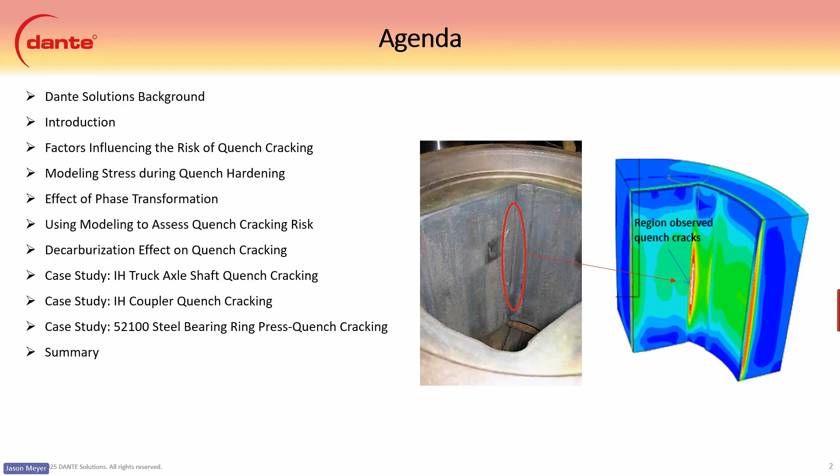So a little bit on the DANTE Solutions background. DANTE is an acronym for Distortion Analysis for Thermal Engineering. We were founded in '82 as Deformation Control Technology, so if you see some papers or publications based on DCT, that would be us, focused on modeling thermal process of metals.

DANTE Solutions has been focusing on heat treatment simulation software since the 1990s, when we were part of a large collaborative effort between industry, academia, and national labs to predict distortion in heat-treated steel alloys. That ran from '92 to 2000, and that's really where the DANTE Solutions software came from. Since then, we've had sole ownership of the software and have been developing, changing, and updating it ever since. The whole project started out of a need to control distortion and reduce scrap in the automotive and aerospace sectors.

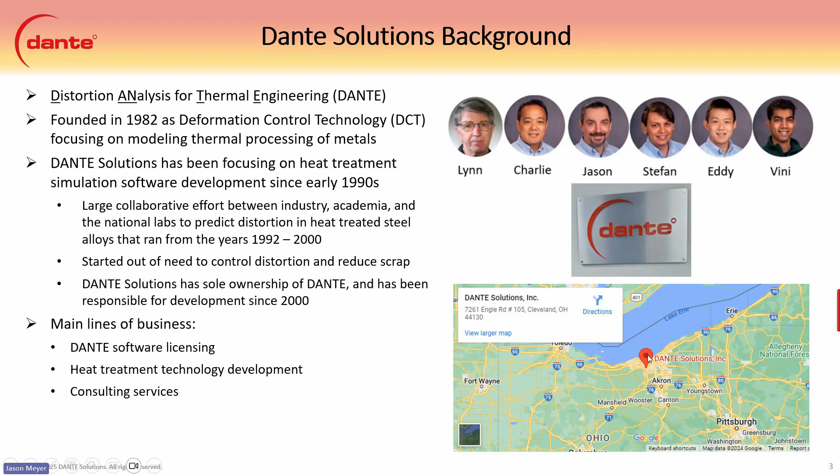Our main lines of business are DANTE software licensing, heat treatment technology development—developing new processes using the software—and consulting services for companies. We're located in Cleveland, Ohio, right on Lake Erie, beautiful, sunny, snowy Cleveland, Ohio. And we've been doing pretty good in this business for quite a while.

A little introduction to quench hardening. During quench hardening, parts undergo extreme temperature change, leading to thermal stresses from temperature gradients. There's a volume change from phase transformations that occurs when you transform to austenite and then to martensite, back and forth, or even to diffusive phases. The phase transformation from austenite to martensite causes high tensile stress to occur, which may result in quench cracking. This is basically from the density change from the more dense austenite transforming to a less dense martensite that takes up larger volume.

These high tensile stresses can cause premature part failure in service, and quenching cracks lead to scrap parts, loss of revenue, and sunken time, so it's a big concern. Understanding the cause of quench cracking can help determine ways to mitigate them. The major applications of DANTE over the years have been troubleshooting and identifying root causes, and providing potential solutions to quench cracking issues.

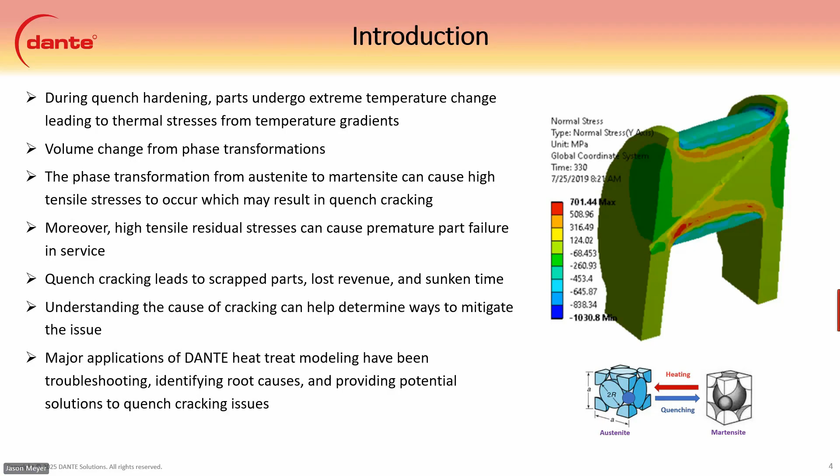So the factors influencing quench cracking: several factors include quenchant selection—a more aggressive quenchant may increase the risk of cracking, but you also have to bear in mind keeping your mechanical properties if you go to a slower quenching. Material hardenability—certain alloy grades are more prone to quench cracking based on the chemical composition. Material defects can have a big effect on stress concentrations, including porosity in the material.

When parts go through heat treatment, those porosities can cause really high stress concentrations, causing cracks. Part geometry, like sharp geometric features, can cause stress concentrations from thermal strains. Process consistency, like part placement and quench agitation, along with a combination of the above, may result in cracks. And decarburization—the lower surface carbon from decarburization results in a higher tensile stress state at the martensite phase at the surface, and this is usually a big cause of cracking. All these factors can be modeled with DANTE.

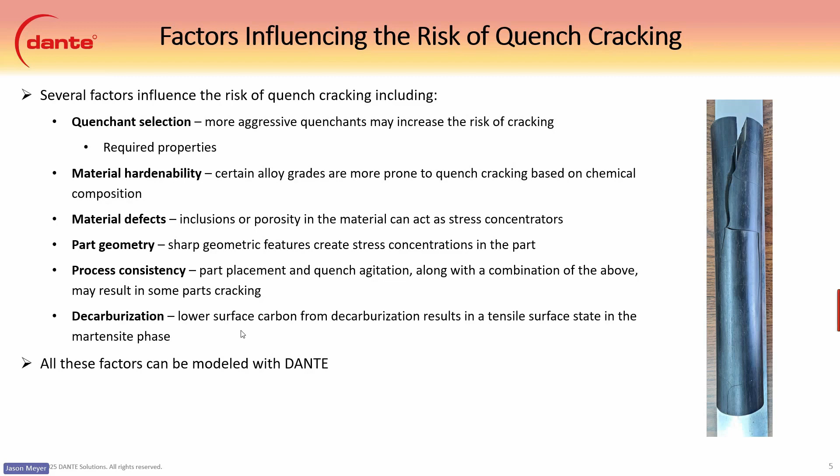So how do we model the stress during quench hardening? With DANTE, we use transient finite element models capable of predicting the nonlinear thermomechanical and phase transformation behavior in the steel alloys. You can see a lot of these yellow or orange arrows here all go into the computer model.

We use thermal boundary conditions, basically in the form of heat transfer coefficients, that we apply to surfaces to represent the heat transfer interaction of the part with the surrounding environment, such as the furnace, the quench vessel, and so on.

We have phase transformation kinetic models that predict the phase transformations and associated transformation strains, and this is really a big part with steels here, like we talked about earlier. And then our multi-phase plasticity model determines the yield criterion of the phases. The strain rate, the temperature, and carbon content all go into that multi-phase plasticity model to really get the mechanical properties down. And what we get out of it is microstructure.

You can see on the contours here below the different phases in the microstructure of the part, so different martensites or different phases of the material. We get dimensional changes, so we can predict the distortion that occurs. And then more importantly for quench hardening, quench cracking here is the residual stresses that occur during the process or even after the process.

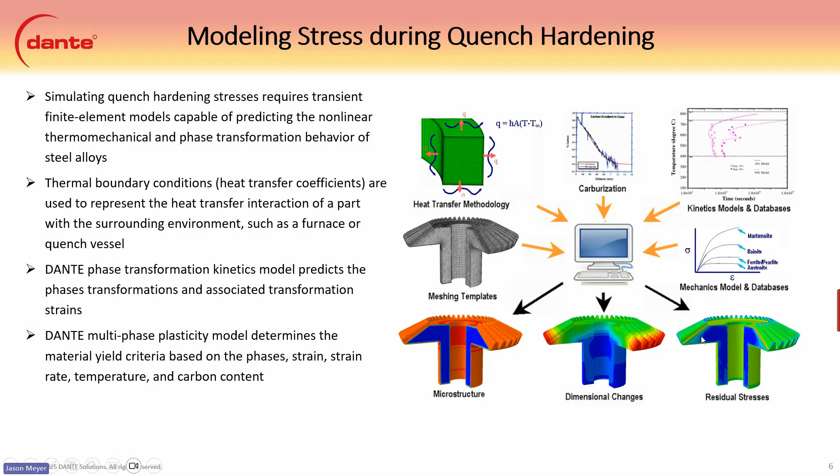So the effect of phase transformation. Quenching causes thermal and transformation-induced stresses. Basically, at the basic level here, the temperature gradient between the surface and the subsurface region causes different phase transformation rates as well. So there's a temperature gradient that causes a phase transformation gradient.

And up here, I have a little example of a one element deep finite element model here, where this would be the surface. You can see the blue color represents a cooler part, and then the red color represents the hotter core of the part. And in an uncarburized part, the martensite transformation from austenite occurs where the temperature is the lowest. So here it would occur first at the surface when it drops below martensite start temperature.

The higher density austenite transforms to lower density martensite, and there's a volume expansion. So you can imagine this area would grow when that martensite is formed from austenite. Then, once the subsurface cools down to MS, this one begins to transform, and when that transforms, it grows as well. This pulls the surface that has already transformed into tension.

If the surface stress is too high, a quench crack can occur due to the brittleness of as-quenched martensite. So over to the right here, we have a little animation that's running here that basically shows the heat treatment process and the phases for the steel.

Upon heating, it goes up to the austenite start temperature. It drops in density, drops in volume, increases in density, and then when it converts to austenite. And then as it's cooled, it converts to martensite, and you can see the volume expansion here on the dilatometry curve. That large volume change here is what we were talking about with pulling the surface into tension here.

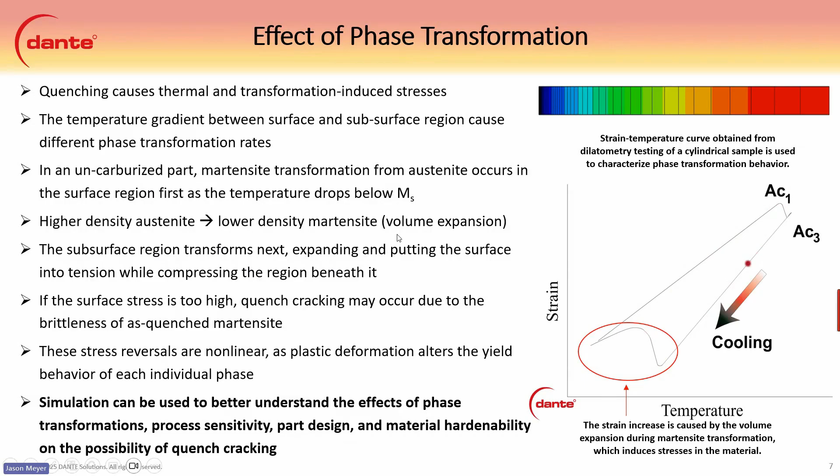So using modeling to assess the quench cracking risks, the predicted in-process stresses and microstructural phases from the model can help assess the risk of cracking. The risk of cracking increases with higher tensile stress, and especially when the microstructure is in the martensite phase. A lot of time when we talk about the cracks, they all happen usually in the martensite, as-quenched martensite phase. Austenite, tempered martensite, and other diffusive phases are more ductile compared to martensite, reducing the crack risk.

Plastic, sorry. So computer modeling is an effective approach to investigate the cracking issues. A sensitivity analysis can show how the part responds to slight changes in the quenching speed, the direction, and temperature. And modeling should be used to aid the design of new processes to reduce the risks of failure before problems arise.

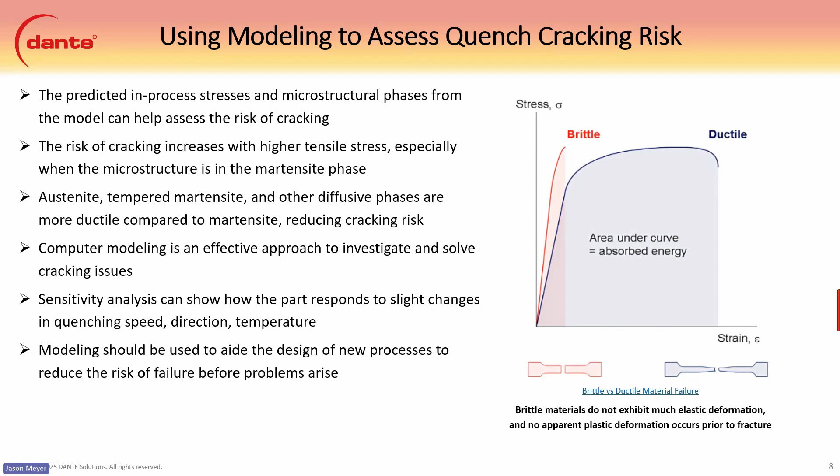So that's all into the background here. And now we're going to talk about a couple of case studies.

One is the decarburization effect on quench cracking. In general, decarburization occurs when an austenitized part is exposed to an atmosphere containing oxygen. What happens is that oxygen helps pull the carbon out of the near surface, resulting in a lower carbon value at the near surface of the part. This reverses the carbon gradient from the case to the core, so the surface has less carbon.

Then a shallow layer of residual stress tension may form, leading to the spalling failure that you see in this gear below. The slight decarburization may cause high tensile stresses during quenching, which can crack while hardening or prior to tempering.

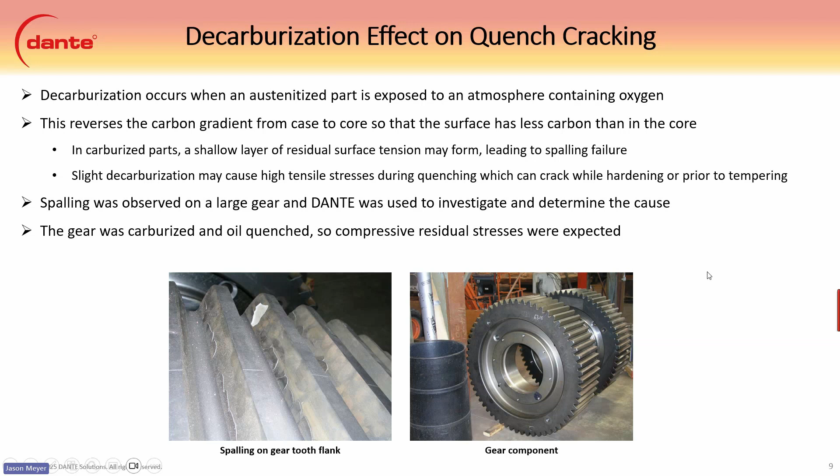In this example, the spalling was occurring in a large gear, and DANTE was used to investigate and determine the cause. This gear was carburized and oil quenched, so compressive residual stresses were expected from the carbon case here.

That's because the transformation to martensite from austenite happens at the case-core interface first and then works its way to the surface. It goes from the inside out almost. Those volume expansions keep adding up until you get to the surface, and it pulls the surface into compression from the last transformation there.

So in the ideal condition, compressive stresses should prevent the observed spalling. After discussing with the customer, the process includes a long air transfer time. So when they take the part out of the austenitizing furnace and bring it over to the oil quench, it has a long duration there.

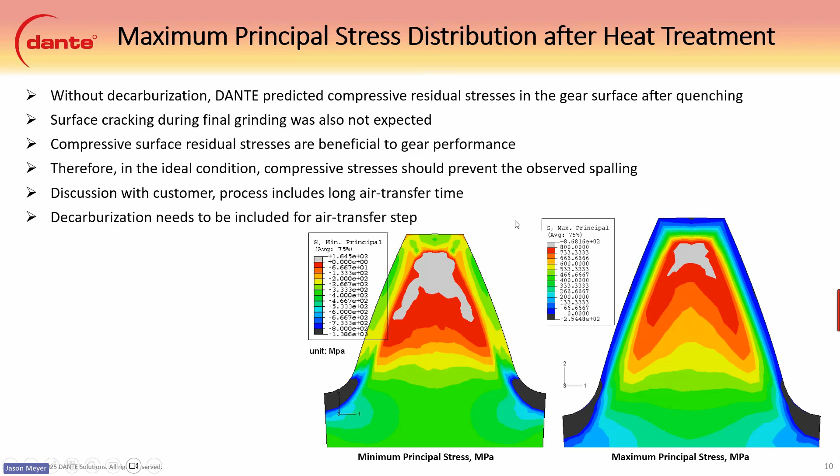And during that time, we believe the decarburization happens. So this would need to be included in the air transfer step.

So the air transfer was only about a minute, and the simulated decarb layer is only about 0.1 millimeter deep.

In DANTE, the way we simulate decarburization is using a diffusion model where the carbon potential is set to a value lower than the surface carbon, so it lets the surface kind of gas out the carbon there. This captures the effect of oxygen removing the carbon from the part surface.

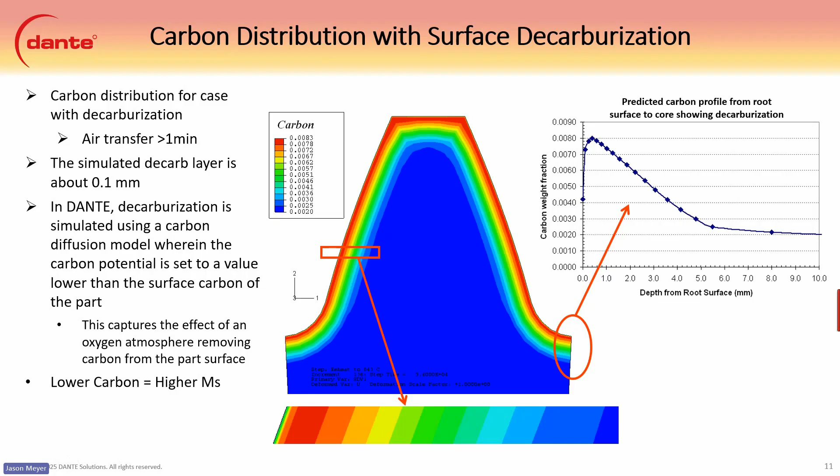The big thing here is lower carbon equals a higher MS, martensite start temperature. So when the part is actually quenched, the outside transforms first, then the subsurface transforms. That's the problem we talked about earlier, where when that inside transforms, it pulls that surface into tension. Since it's as-quenched martensite, it can crack easily under high tension.

And this depth is greatly affected by the depth of decarburization. So obviously longer decarb would give you less carbon near the surface, and so it can give you higher tensile stresses.

This tensile stress is enough to cause the spalling effect that we see in the actual gears. The carbon effect on the martensite transformation - I'll reinforce that a little bit - how the surface transforms first here, given the higher MS from the lower carbon at the surface. And then once this region transforms, it pulls that into tension.

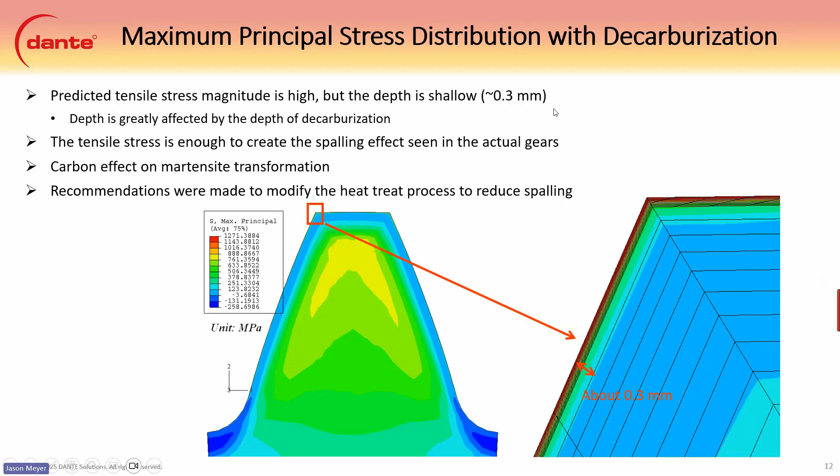So given the model here, we were able to see the issue, and recommendations were made to modify the heat treatment process to reduce the spalling.

So the next case study we have is induction hardening of a truck axle shaft. This axle shaft was experiencing high tensile residual stress in the core, and there was some subsurface cracking and fractures that were happening during service.

It's really difficult to measure and quantify those without modeling because the inspection methods on the surface can't really capture it. You have to use something to see inside. So the axial dimension of the shaft was also a concern. It was increasing inconsistently after hardening, and that was causing some assembly issues.

We used a Joule heating method to mimic the induction heating, mapping the temperature profile from the modeling. Since we don't really model the electromagnetics, the Joule heating works really well for this process.

On the outside, there was a spray quenching boundary condition applied based on the scanning speed of the inductor. The gap between the inductor and the spray line was used to model this.

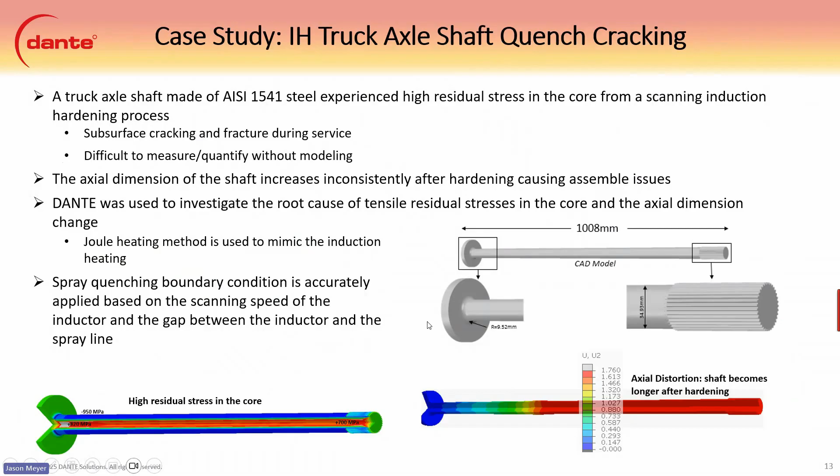The process includes a dwell at the beginning, then a quick jump in speed, and an averaging of the speed and spray throughout. The spray quench is about an inch below the inductor, and the quenching uses a 6% polymer solution.

For the heat treatment model, we modeled one sector of the shaft, one of the splines, cut down the entire length using symmetry on the axle. We could also use symmetry because the axle is spinning, so there's really no circumferential difference in heating around the part.

We were able to use this model to accurately represent the induction heating. We packed about 60,000 elements into this model, with more elements in the case region to capture the high gradients and stress concentrations in the part.

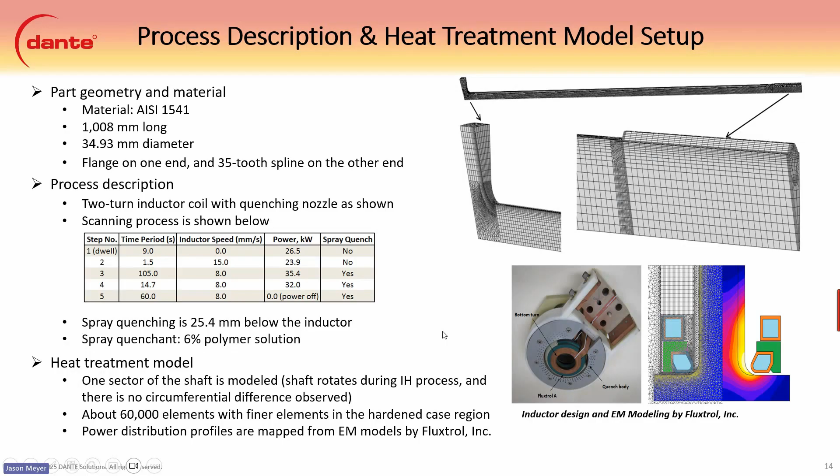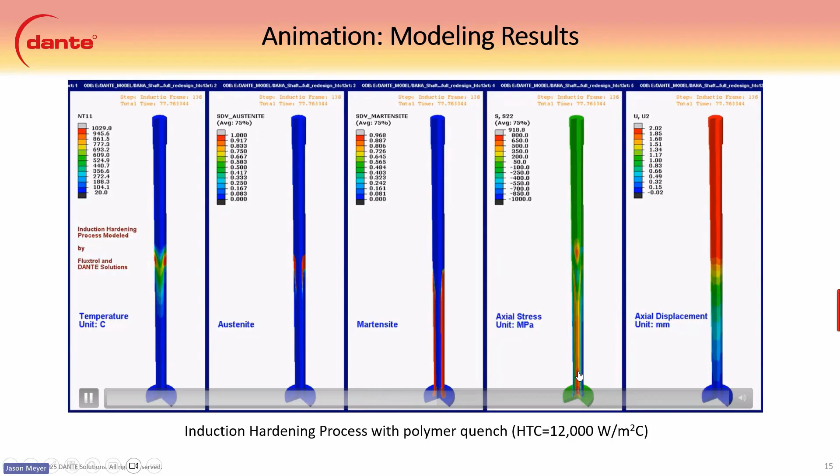The axial displacement is shown at the end here as well. The big thing is really these stresses—the compression on the surface, and then the subsequent tension in the core.

The results show the middle section done with the 12,000 watts per meter quenching boundary condition, showing pretty significant tensile stresses along the core of the shaft, with more near the flange end, and good compression at the surface of about 750 MPa.

The reason we see this difference in stress, with a big peak stress, is that with induction hardening, only the near surface region is transformed, compared to a furnace heating process where the whole body is heated—there needs to be a stress balance. With induction hardening, if you only transform that smaller surface, the stress balance comes only from that near-surface compression, so we usually see very high tension underneath.

We did a pretty exhaustive case study on this project. We looked at 3 different quench rates, since that was one of the levers they could pull: a reduced quench rate of about 5,000 watts per meter, and a higher rate of 25,000 watts per meter, compared to the baseline model.

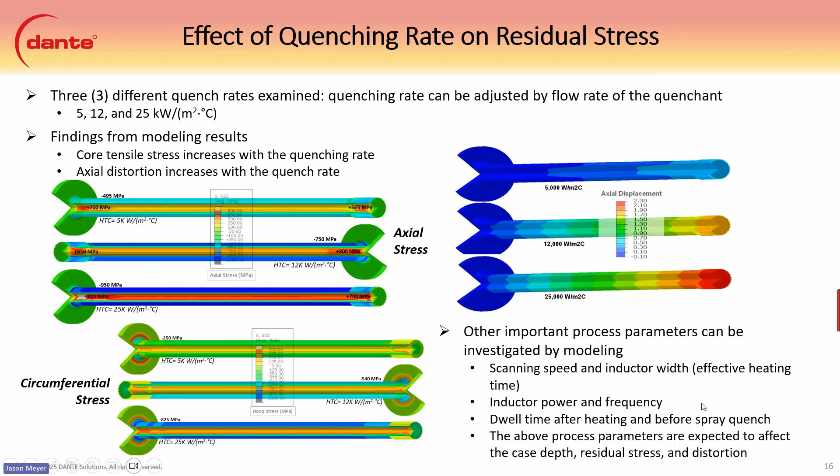So what's nice about modeling is we can do a deep dive into the part response. We don't just see the black box, where you put the part in and get the part out. We're able to step through and see critical regions.

One of them that we noticed was at 16.5 seconds. The inductor is moving up at its constant rate of 8 millimeters per second, and the lower area is actually being spray quenched. So these are just kind of results at that 16.5 second time during quenching.

Left to right here, we show the temperature. You can see the region that's being heated by the inductor, and you can see that it's being cooled underneath already by the spray quench.

We can see the austenite phase being formed from the temperature reaching AC1 here. You can see that it's not completely uniform down here because some martensite has already begun to form at this time - it's about 94%. It is almost nearly complete right at the surface here. There's still a little bit more to go as it goes up and cools.

But right now we do see in the S33, the hoop stress region here, we do see a line of tensile stresses being formed under the case here.

Again, just to drive it home, the stress balance here is really the most important thing. Only this region is being transformed into austenite, and then this region is being transformed into martensite. So it really only has this region to have the stress balance. It has this compression here, and it needs to have some sort of tension in order to balance it out, and has this volume to do so.

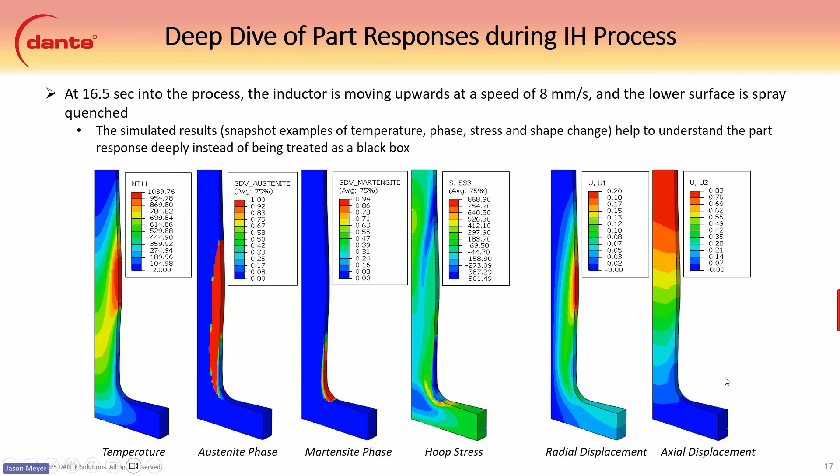We also plot the radial displacement here, and this bulge here is shown basically from the heating, the thermal expansion. It kind of expands the shaft as it pulls out. And then the U2 shows the length change, overall axial displacement in the shaft.

Continuing with the deep dive, we can see the part response during the induction hardening here. So 4 points were modeled on the shaft to show the depth - one on the surface, one at about 4 millimeters down, one at about 8 millimeters down, and then one representing the core.

These 4 plots here show the effect on the material as the inductor passes over and is spray quenched. Starting left to right, we have the temperature, and we can see that the surface reaches a little over 1,000 degrees C, and the 4 millimeter point goes up to almost 900, and both of these transform to austenite here. These 2 points below don't transform; they only get up to about 700 degrees here. So the depth of transformation here is really within the case.

We have the fraction of phases as well, so we can see that the austenite is formed here really quickly between A and B, and then the surface transforms, and then the core, or the 4 millimeter point, transforms slightly after it.

So we can see the fraction of phases that are occurring. And then this kind of all leads to some important stuff, the stress reversals in the part.

So we can see the axial stress here. We're starting with the blue, which is the surface measurement. You can see that it goes quickly to compression here from the heating, and then it works its way up. And then once it starts to transform to martensite, it has another drop down to compression. And then through this phase transformation, it finally ends up at a higher compression here. So it shows the stress reversal from compression to tension to compression that happens during heat treatment.

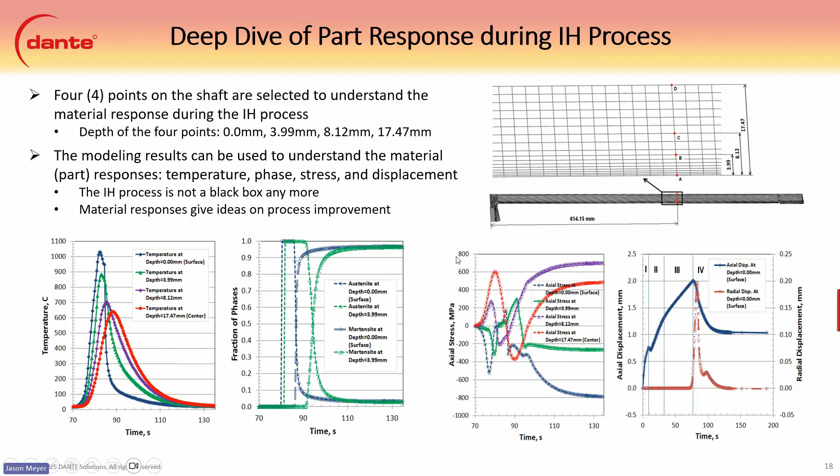So a lot of this really helps us see what's going on in the part as it's being heat treated, and it's really effective to be able to step through and see these issues happen as they occur in the part.

So lastly, the last thing we did was they suggested that we try three different materials, or two different materials. We had the baseline 1541. We also looked at 4140 and 1040. All of these are 0.4 carbon here, or just about.

And you can see the table down below. They all have kind of similar martensite start temperatures. They do have very different DIs as far as hardenability.

And so the results show they are all kind of in the same range as far as the residual stresses afterwards. There isn't very much change between the three different types of models, but we do expect with a higher carbon, like say 0.6, or even lower carbon 0.2, we may see some very different results here in the residual stresses. But since they all are about the same carbon, they all behave relatively similarly.

1040 does have the lowest hardenability. You can see here the DI is only about 30 millimeters. And we do see some bainite phase during quenching, or after quenching, in the core, whereas the 1541 and the 4140 transform to martensite only in the case.

And this is really kind of useful in part design and material selection. So if you wanted to test different materials, you can look at it and see what kind of response would happen with the same heat treatment schedule that you would use.

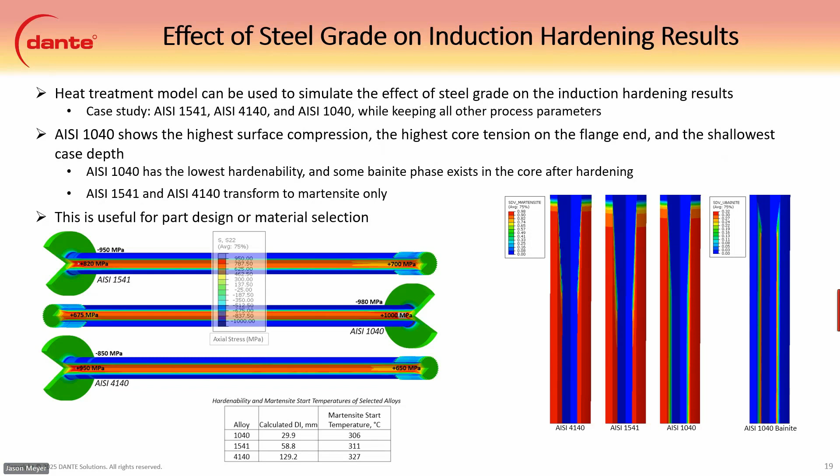Our second example case study here is an induction hardened steel coupler. We're transmitting torque through shafts here. And this one, again, uses an induction hardening process, a scanning induction hardening process. You can see the part here and then the model quadrant.

Here, the thing to note is it's kind of like a rectangle hole inside of a circle, so there is some section thickness difference, and I'll talk about that a little bit more here. DANTE was used to investigate the induction hardening process to identify the reasons for the cracking that they see in the corners here, and then to give a process modification to eliminate the cracking problem.

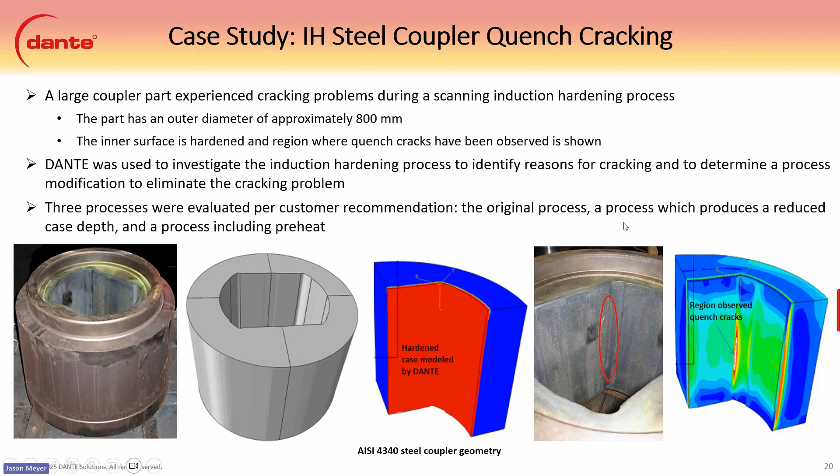Three processes were evaluated per the customer recommendation. They wanted us to model the original baseline process, a process which produces a reduced case depth, and then a process that includes a preheat.

So building the model again, this one was made of 4340 steel. It has a case depth of about 4 millimeters, and the width of the inductor is about 100 millimeters. You can see the inductor here at the bottom right.

The inductor travel speed is about 3 millimeters per second up the shaft, as you see it on the part here. And then the dwell time between the inductor and the spray start is about 10 seconds, so it heats up for about 10 seconds before it starts to spray.

Power distributions and functions of time and geometry are estimated to mimic the induction heating. Again, we use the joule heating modeling here.

This is based on the frequency and the power of the inductor, and basically targeting the case depth that they requested. So we used a quarter model, again, using symmetry as best we can.

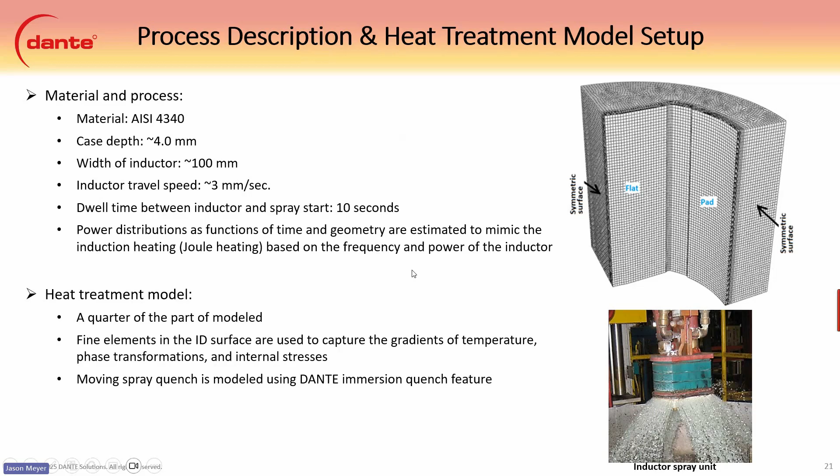We used much finer finite elements on the inner diameter of the surface to capture the gradients of temperature, phase transformation, and any internal stresses that are formed from the induction hardening process. The moving spray quench was modeled using the DANTE immersion quench feature, a nice subroutine used for quenching these.

So the original process, or the baseline process - the figures on the right show the maximum principal stress and the martensite phase. The maximum principal represents the hoop direction, really showing the quenching here, the cracking that they experience. It kind of dominates the quenching.

So for the selected critical point here, you can see it in the figure in the bottom right. We show the temperature history, where it starts off at room temperature, then spikes up to about 900 degrees on the surface and the corner, then drops down and quenches to martensite, with eventual air cooling afterwards to get to room temperature.

Just like we saw with the induction shaft, we have a compression here due to heating, and then as it's balancing out, it goes back up to tension. You can see the residual stress is on the secondary side here, and it gets to about 650 MPa, then transforms to martensite, and you can see the compression formed from that transformation.

And then when it's cooled and quenched completely, we see it goes back up to tension, getting up to almost 800 or so MPa here, and we believe that's when the quench cracking actually occurs in the part due to the martensite phase.

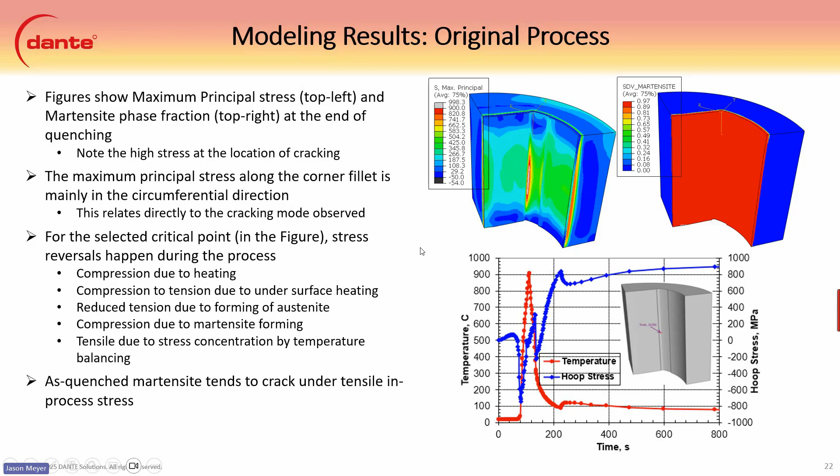So that high tensile stress is based on the temperature rebalancing in the part, and the as-quenched martensite tends to crack under tensile process stresses. You'll be hearing that a lot today.

So the next model we did was the one with the reduced case depth, and the idea here was the customer believed that less transformation would cause less tensile stresses and probably reduce the cracking. They never ran one like this, so they wanted to see a model first to see if it could help solve the problem.

The model results show that the simulated stress is approximately the same between the baseline model and this reduced case depth. This is a pretty significant finding for them that saved them a lot of time and money by eliminating an actual physical test.

You can see the time temperature results here, and you can see the hoop stresses here. It still has a pretty high magnitude. This section here that's very hard to see is actually exploded down to here.

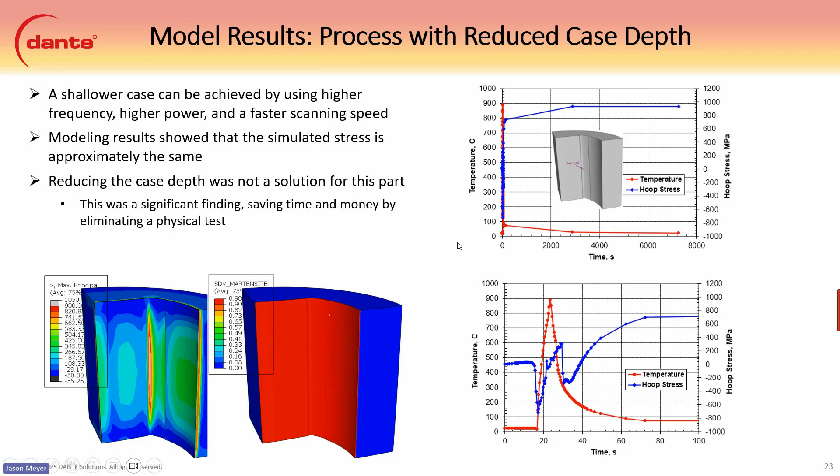And again, it shows the same story that we saw with the baseline model. We start off really neutral, and then it goes into compression. Then once the martensite transformation happens, we go back to compression, and it ends up a little lower magnitude, but still problematic as far as the quench cracking that's observed.

So the last model they requested was the process with a preheat. This part was preheated before induction hardening, and it was modeled to be done by furnace heating - taking it out of the furnace and then induction hardening afterwards.

This can also be done with low frequency induction heating. The induction preheating has some advantages over the furnace preheating, and all of these can be modeled here with DANTE, mainly for the speed - hitting it with low power, low frequency, and then doing the actual hardening process afterwards.

The uniform preheating temperature of 260 degrees was used, and this is just an assumption. We can also look at different temperatures and optimize them, but for this one we used 260 degrees.

So due to the higher initial temperature, the power used for the inductor was reduced to about 70% to produce the similar case depth. And this keeps all other process parameters like the quench and scanning speed and everything the same.

After quenching, the corner fillet reached a peak stress of about 550 MPa, as shown in the figures here. You can see the hoop stress again is on the secondary, and the cracking possibility is greatly reduced by this magnitude being much lower.

Let's start here with the temperature. It's about 260 degrees to start, and then we heat up to about 800 degrees or so in the corner there, and drop it down to room temperature with the quench.

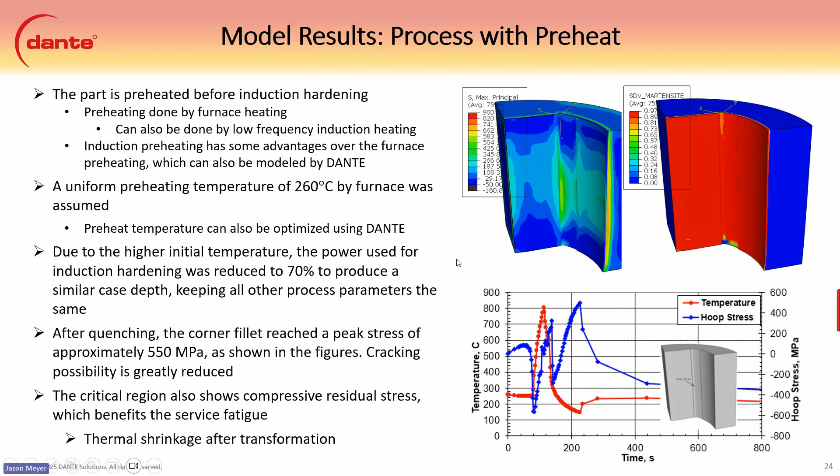All right, our last case study here has to do with the 52100 bearing ring. This ring is hardened by a press-quench process, and a high percentage of them, about 60%, are cracking.

There's the ring geometry, and it's about a 4-inch ring here. The outer surface has this little concave shape, as you see here, for the bearings to ride on.

The material again is 52100, and the DANTE heat treatment modeling is used to find the root causes of cracking and solutions. We used a 2D axisymmetric model for this, so we took the cross section and were able to model that with contact from pads on the top and bottom, and the expander on the inside.

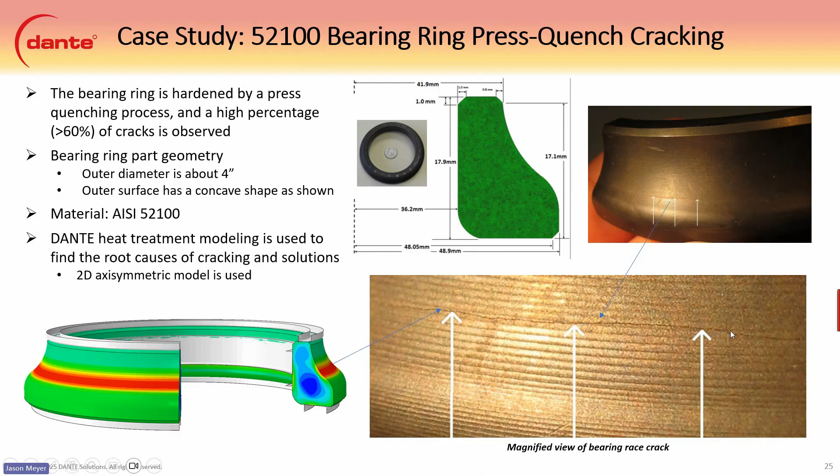Here's an image of the quench crack. I hope you can see that on your end. It shows the cracking along the outside edge of the race here.

So with process modeling, we have the maximum principal stress shown in the contour here. We have the temperature of the part—you can see it being quenched right now. And then we have the martensite transformation happening right there, the volume fraction.

The important and critical part of this is right about here. When the martensite transformation is pretty much complete on the outside, the core begins to transform. You can see more of a green color here, whereas the outside is all as-quenched martensite. When this begins to transform, it's being held in by the pads on the top and bottom, and really the only way for it to go is outward with the volume expansion. You can see that results in a very high peak stress around the region where they're showing the cracks.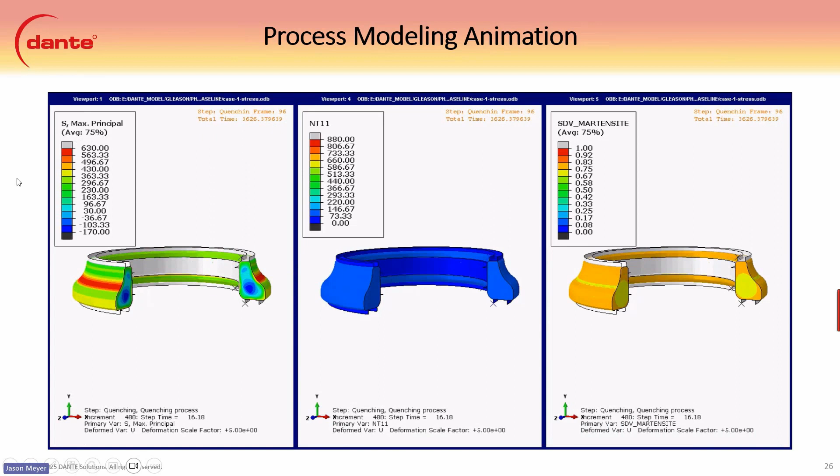So there's a little more exploded view in the timestamp step here. Again, we have the crack and we see the high tensile stresses. You can see in the core here it is kind of a little bit in compression, because the martensite is transforming and it's basically pushing out.

You can imagine arrows pointing out in all directions, pushing out like that. The only way it can go is outward, and it opens up the bearing race, causing high tension in the martensite phase.

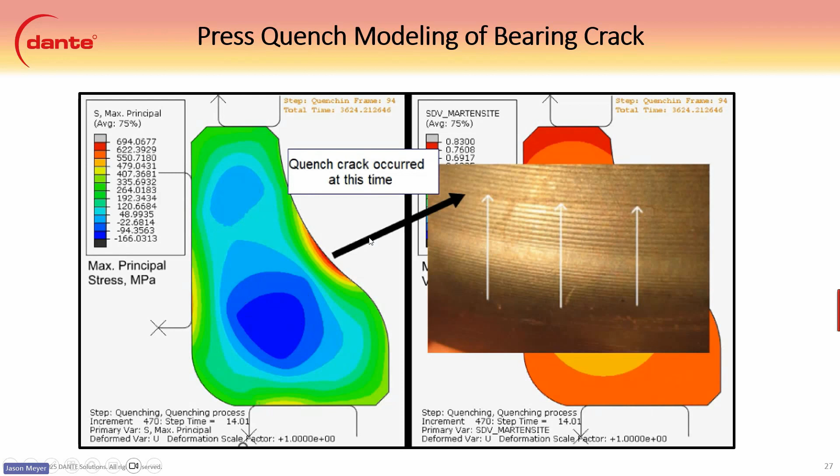So 52100 has a really high hardenability, and the austenite transforms basically only to martensite during the quenching process. That austenite-to-martensite transformation in the core is delayed compared to the surface, and this delayed martensite transformation and the volume expansion associated with it causes surface tension and stress in the outer layer we were just talking about.

For this model, we also used the ring surface on the top and bottom here—they kind of stick to the press-quench dies. We found that the pulsing load is not applied during the press-quench, even though it does have the pulsing feature. A lot of things can cause it to kind of stick here.

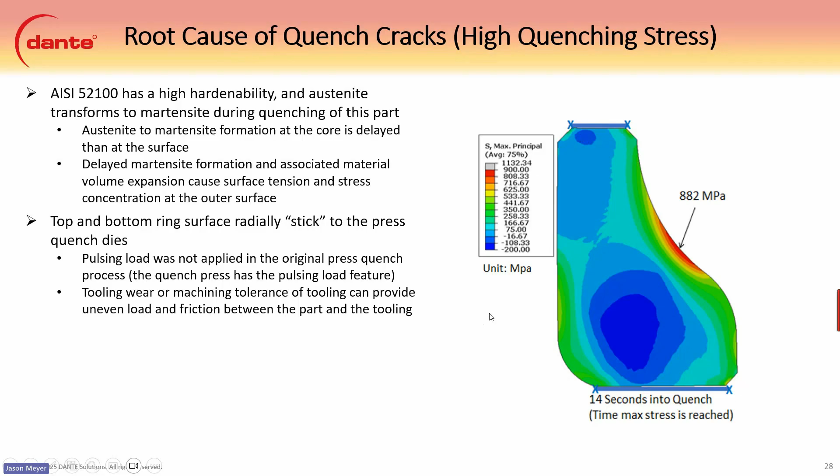Some of these were like the tooling wear of the actual press, from continual use, which could cause uneven load or friction on the part while it's being processed. They could also have machining tolerance for the ring itself be a little off, and then they would have higher and lower load regions, causing more friction in tooling as well.

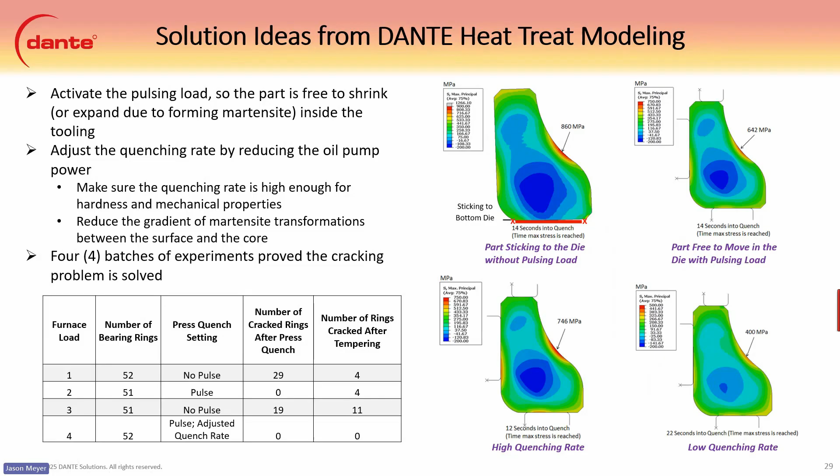So, solutions. We have several models that we worked with here. We had a sticking model with the normal quenching rate. We also had an adjusted quench rate because the customer said they can do a lower quenching rate by reducing the oil pump power. We have to make sure the quenching rate is fast enough for the hardness and mechanical properties needed for the bearing ring. So we wanted to run the model to see those as well.

The idea here was to reduce the temperature gradient, which reduces the transformation gradient between the core and the surface. So we have 4 models here, and you can see it's about 860 MPa in the sticking model.

When the part was more free to move with the pulsing load, we reduced the tension seen during the process. This one was with a higher quenching rate, and it actually increases compared to the pulsing load. The last model we did was a lower quenching rate, and it reduced significantly the tension shown on the outside edge.

So the 4 batches they ran experiments on: the first one was the baseline they had before, run with no pulse, and you can see a lot of them were cracking, about 60% or so.

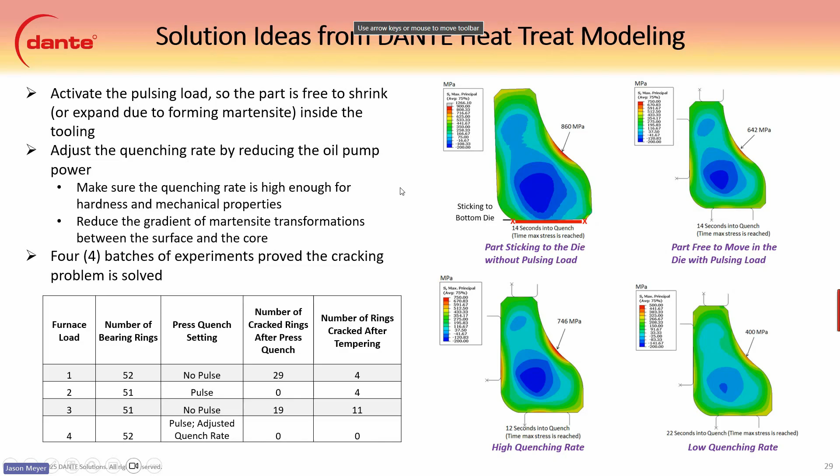They ran a batch with pulse, and only 4 cracked during tempering, none after quenching. They redid the first test, with similar results to test number 1. Then the pulse load with the reduced quench rate resulted in no cracks whatsoever through the entire batch. I'd say that's a huge success.

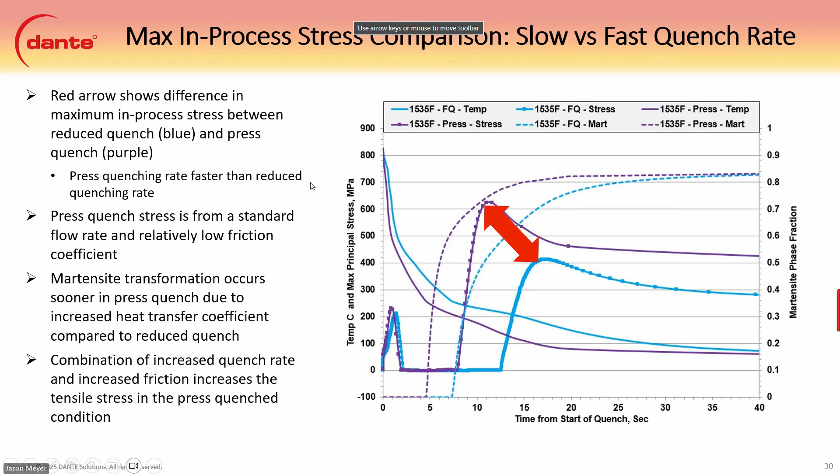All right, so summary. The strain and material volume change caused by phase transformations during quench hardening plays a significant role in the internal stresses and cracking possibility. Highest tensile stresses in as-quenched martensite determines the cracking possibility. That's really the big takeaway of today.

Stress concentrations caused by part geometric features should be considered. When you have strains in the part - basically thin, thick sections - you will have a lot of stress concentrators in sharp geometric features. Material cleanliness should be considered, or surface condition effects on the cracking possibility. If you have inclusions or porosity in any way, those can affect cracking because they're good stress risers.

Surface decarburization was shown to have a big effect on the phase transformation gradient. The temperature gradient or phase transformation gradient in the part during quenching has a significant effect on the magnitude of those internal stresses. Quench cracking risk can be reduced by lowering the peak stresses during quench hardening.

Process changes like using a protective atmosphere, proper quench and agitation, and material and part design changes can be considered to help lower the quench stresses. DANTE heat treatment modeling can be used to troubleshoot and evaluate potential solutions to quench cracking, or to evaluate new processes to assess the risk of quench cracking.